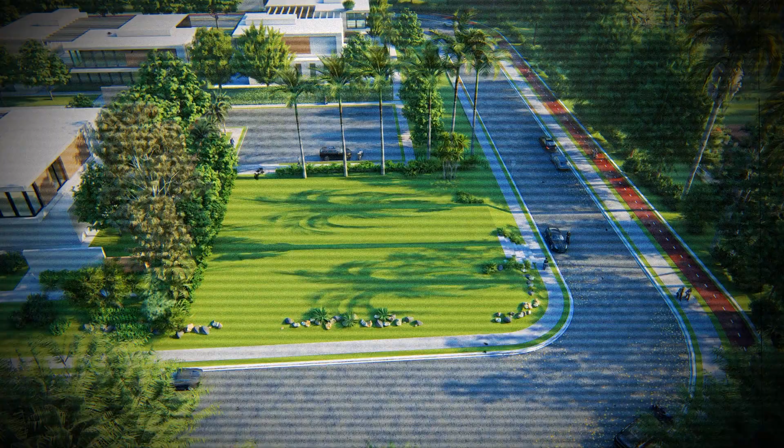With the aim of making the world cleaner, efforts to advance it are hydrogen-fueled cars and electric cars. Both cars produce zero harmful emissions on the road.

Unlike electric cars, which take a fair amount of time to recharge, hydrogen cars can be refilled about as quickly as a petrol or diesel car. But does this mean they're not polluting?

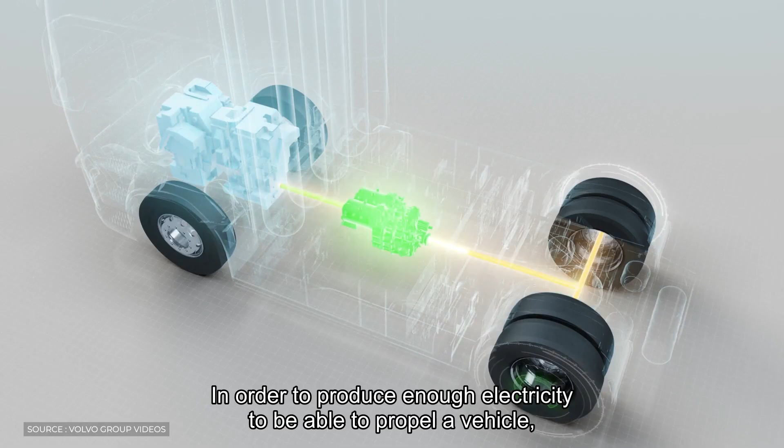First, it is important to understand how each technology operates in order to compare the two types of vehicles. The base of hydrogen-powered vehicles are fuel cells. Consider them the maestro of all the internal mechanisms that give the car its power to move.

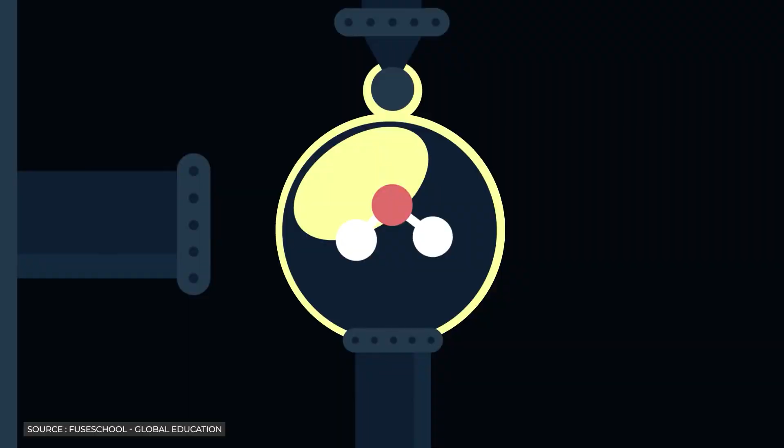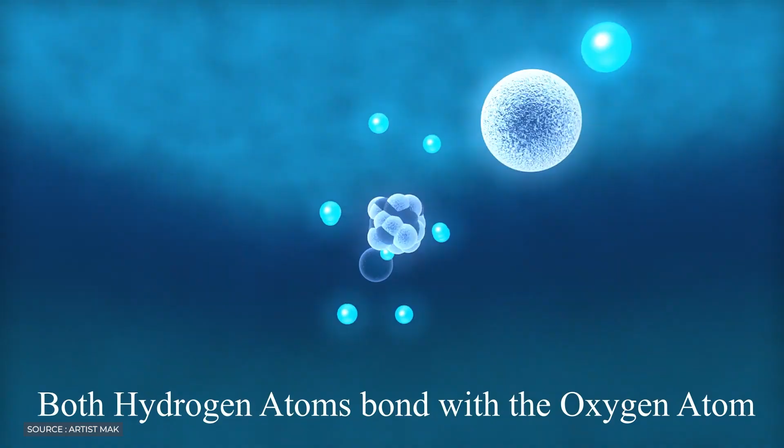A fuel cell in a hydrogen fuel cell vehicle is fed by a hydrogen tank with high-pressure hydrogen gas that will mix with oxygen. With no harmful exhaust emissions, the car is then propelled by an electric motor that is powered by this electricity. The only byproduct of the entire process is heat and water, produced when hydrogen and oxygen atoms come together to create water molecules.

Electric cars, on the other hand, are propelled by motors that draw power from rechargeable batteries or other portable electricity sources. No chemical reaction occurs once they are moving. Instead, the power the batteries receive during charging causes an electric reaction.

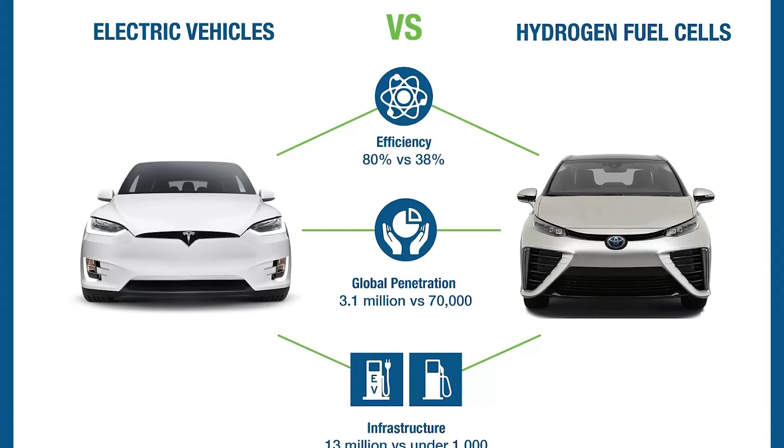But which is more reliable and friendly to the environment? Vehicles powered by hydrogen or electricity. Before making any judgments, let's take a look at the most important characteristics of each type of car.

Hyundai Nexo, a hydrogen-powered vehicle, has a range of about 330 miles or 550 kilometers, which is comparable to the best electric Tesla Model S.

However, it's challenging to estimate these cars' driving ranges precisely. It depends on a variety of factors, including the type of vehicle being driven, how many people are in the car, whether the air conditioning is on or off, whether the automobile is on a highway or snarled in traffic in the city center, and more. Because each person's unique combination of all these elements is distinct, various people have been reporting varied experiences.

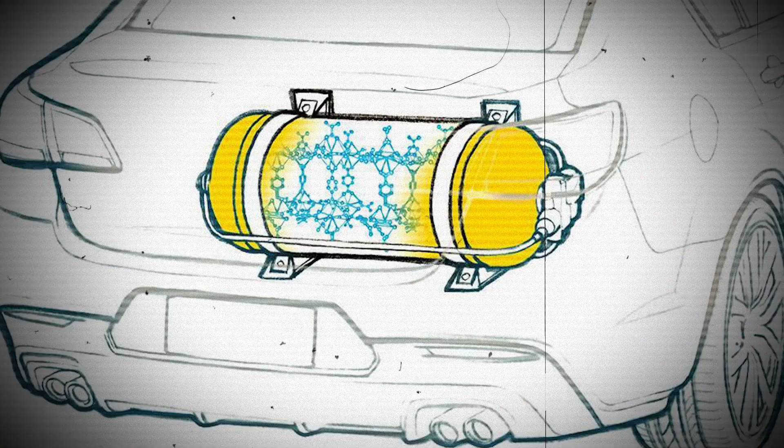However, because hydrogen vehicles pack their energy storage tightly, they can typically travel farther. According to Automotive Technologies, hydrogen-powered vehicles may travel up to 300 miles on a single charge, compared to the typical 100 to 200 miles for fully electric vehicles.

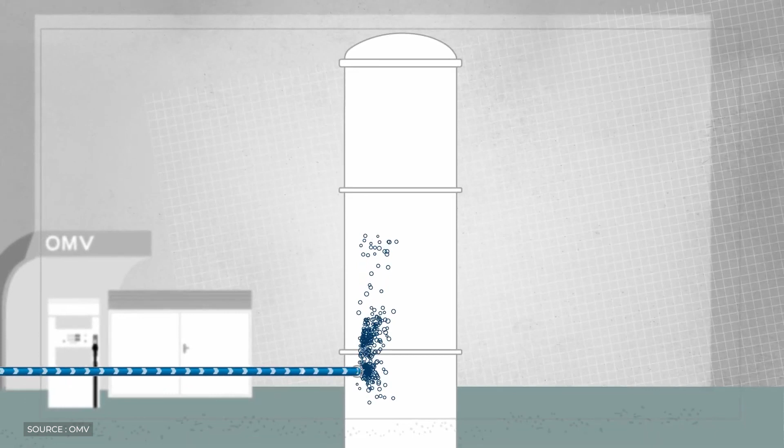Much more fascinating is how long it takes to pump hydrogen into the tank. Similar to any gasoline-powered car, it takes 5 to 10 minutes. While Tesla's 120 kilowatt fast chargers can charge batteries to 80% capacity in 30 minutes, the BMW i3 or Nissan Leaf may require 4 to 8 hours to reach full capacity.

In the end, the charging station and the type of charging connector clearly affect how long it takes an electric automobile to charge. Whatever the combination though, and even with Tesla's newest V3 supercharger, this is unquestionably a victory for the hydrogen vehicle. While the use of fuel directly in the car does not emit carbon dioxide, the manufacturing of

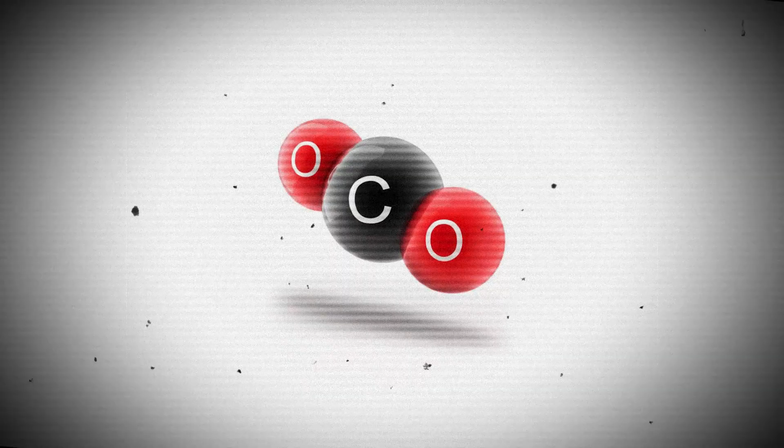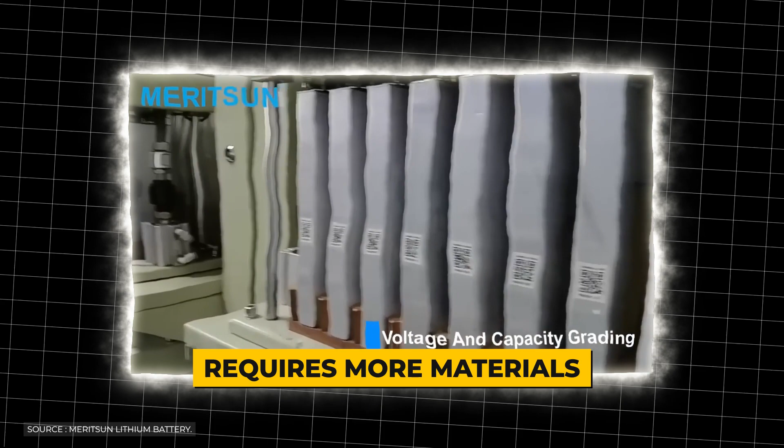batteries and the production of electricity both contribute to greenhouse gas emissions. According to Yang Shao-Horn, professor at MIT departments, producing lithium-ion batteries for electric vehicles requires more materials than producing conventional combustion engines, and the need for battery materials is growing.

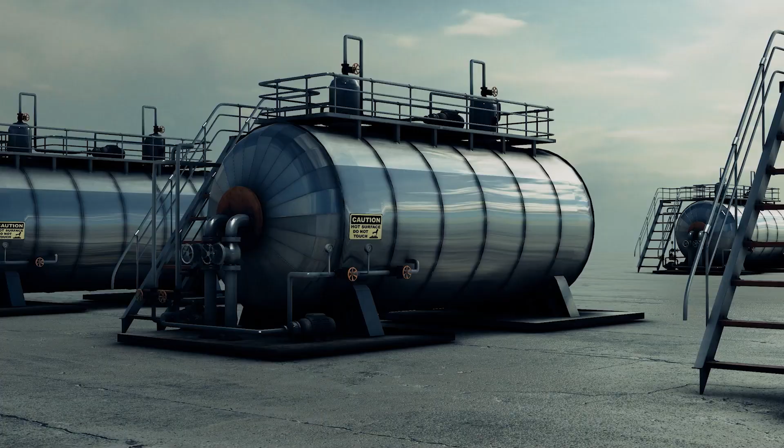The majority of lithium is now produced from hard rock mines or underground brine reservoirs, and a large portion of the energy required for its extraction and processing originates from CO2-emitting fossil fuels. Particularly in hard rock mining, 15 tons of CO2 are released into the atmosphere for every ton of lithium produced.

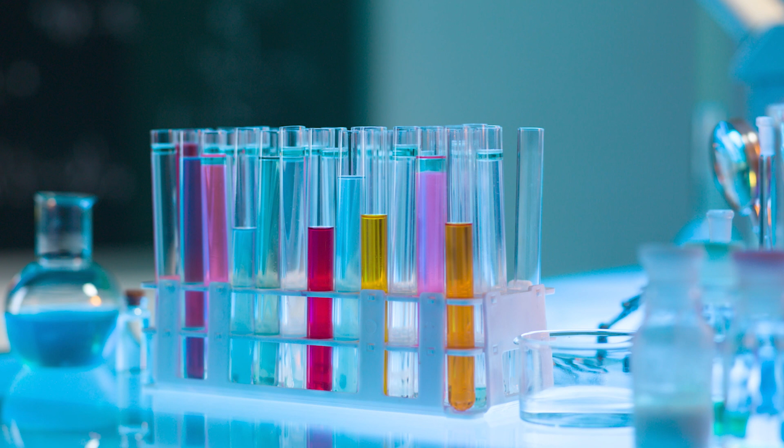Other costs are associated with battery materials. Lithium, cobalt, and nickel are examples of raw materials that need labor-intensive mining processes, large amounts of chemicals and water, and have the potential for contamination and toxic waste. 60% of the world's cobalt is produced in the Democratic Republic of the Congo, where concerns about issues like child labor persist. According to Shao-Horn, the environmental impact of manufacturing these batteries also increases.

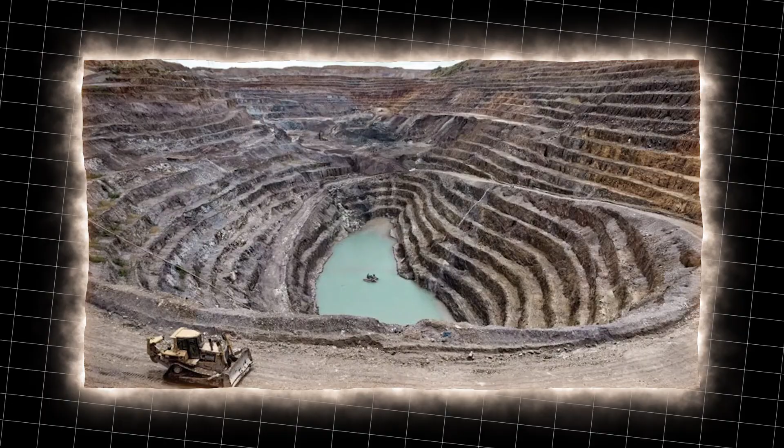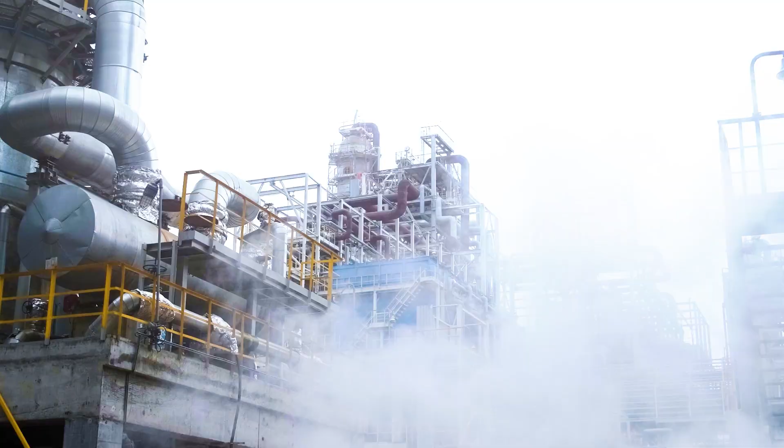It takes heat between 800 and 1000 degrees Celsius to synthesize the materials required for production. This temperature can only be attained economically by burning fossil fuels, which again increases CO2 emissions. Exactly how much CO2 is emitted in the long process of making a battery can vary a lot depending on which materials are used, how they're sourced, and what energy sources are used in manufacturing.

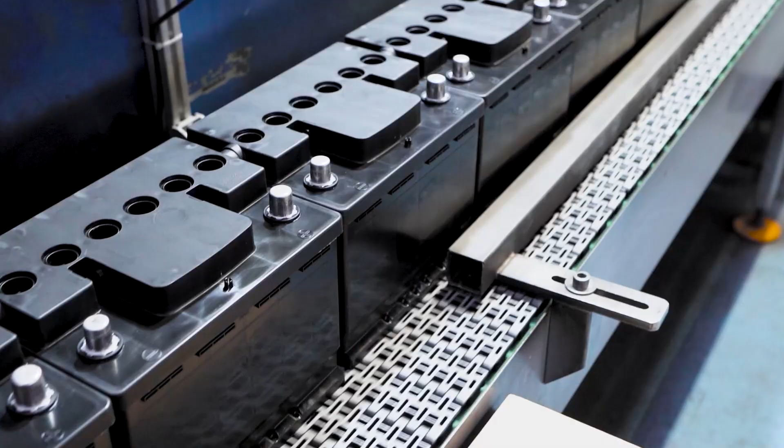The vast majority of lithium-ion batteries, which account for about 77% of the world's supply, are manufactured in China, where coal is the primary energy source. And coal emits roughly twice the amount of greenhouse gases as natural gas.

For illustration, the Tesla Model 3 holds an 80 kilowatt-hour lithium-ion battery. CO2 emissions for manufacturing that battery would range between 2,400 kilograms and 16,000 kilograms.

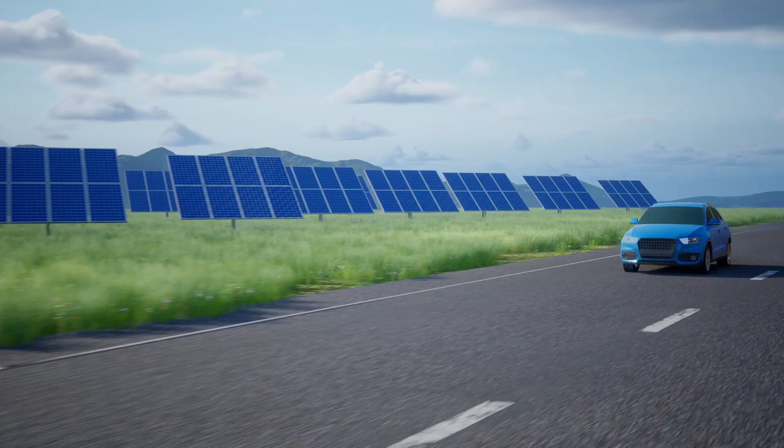Just how much is 1 ton of CO2? As much as a typical gas-powered car emits in about 2,500 miles of driving, just about the same weight as a great white shark. Electric cars generate approximately 17 kilograms of carbon dioxide per 100 miles traveled.

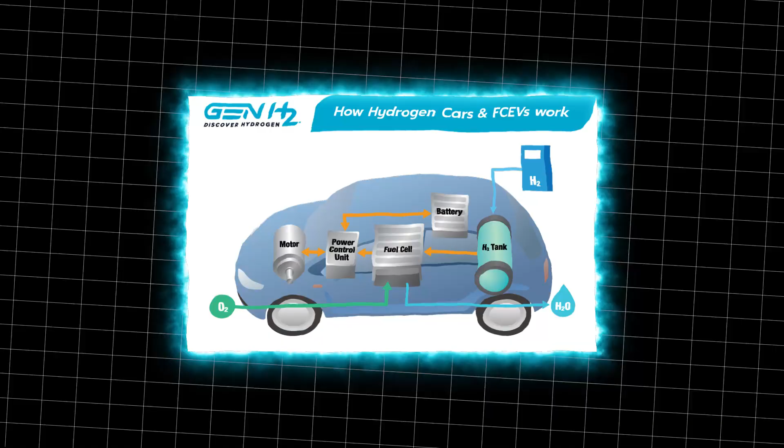Now let's talk about hydrogen cars. Although hydrogen is the most common element in the universe, it doesn't exist in its pure form on the blue planet. This means that if we wish to use it as fuel for our cars, we need to produce it out of other compounds like water, natural gas, or other fossil fuels or biomass.

And for this, energy needs to be used. Environmental and economic costs enter the equation. On one hand, to get hydrogen in a clean way is by reversing the electrolysis process of water. The problem is that this process of separating water molecules to get the hydrogen spends a high amount of energy, making it a very expensive process.

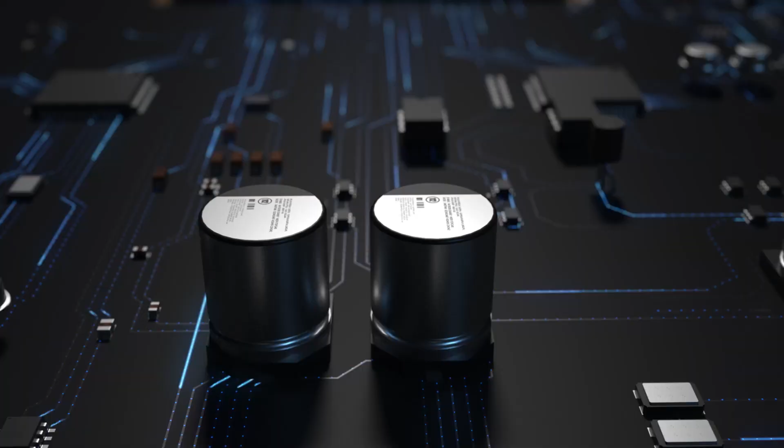However, if this energy is able to come from renewable energy sources like the sun or the wind, the net energy cycle can get very carbon low and the process turns more environmentally friendly. Yet, another situation is the efficiency of the process, that's only 75% efficient and allows for 25% of electricity losses.

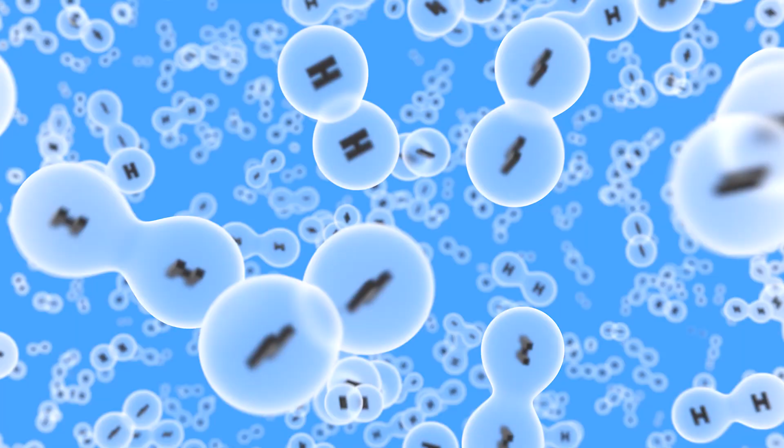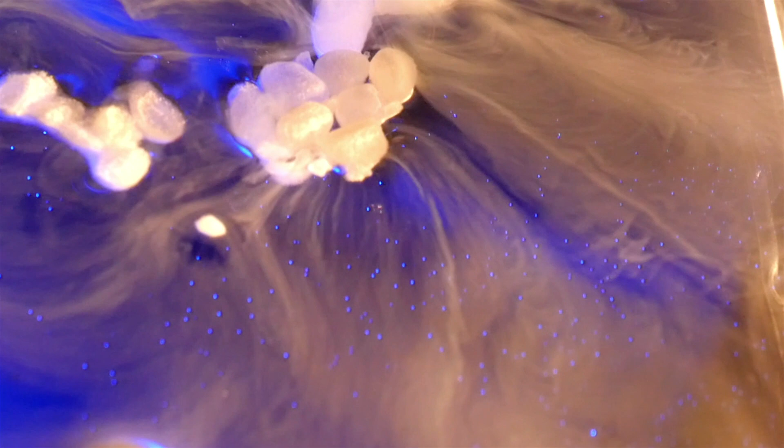This is why most hydrogen fuel is obtained by the process of methane reforming, which is less expensive than electrolysis. It is around 75% efficient, but produces 9 to 12 kilograms of carbon dioxide for every 1 kilogram of hydrogen. The downside is that harmful byproducts such as carbon dioxide and carbon monoxide are produced in the process.

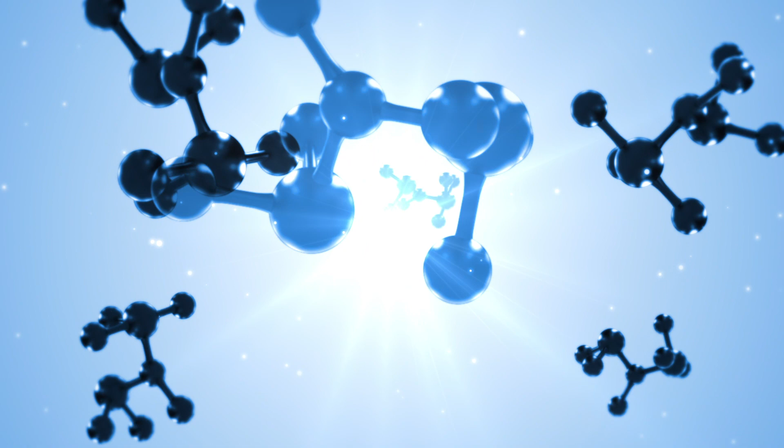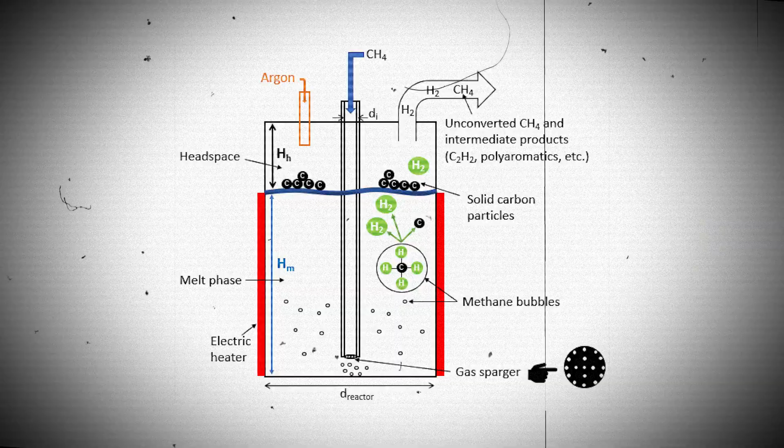Furthermore, and although they're becoming less frequent, methane leaks through pipelines while extracting natural gas are not convincing. These molecules are 86 times worse than CO2 released into the atmosphere. Even if the methane cracking process is improved, it isn't likely to be a long-term solution.

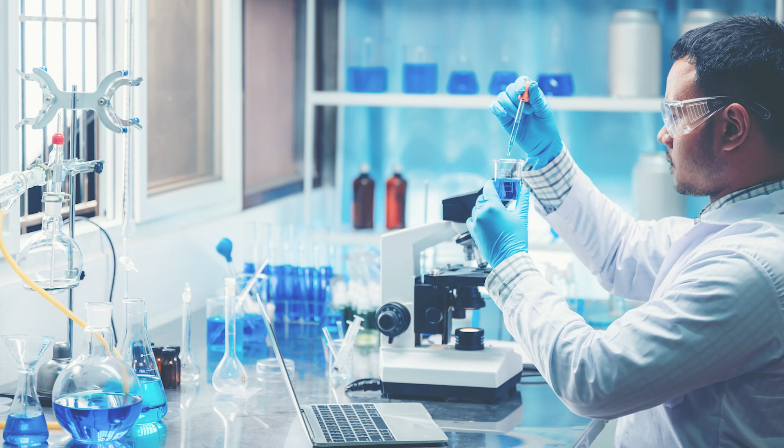Researchers across the globe are trying to design new manufacturing processes or new battery chemistries that can work with more readily available, environmentally friendly materials, but these technologies aren't yet available on a wide scale. If we don't change how we make materials, how we make chemicals, how we manufacture, everything will essentially stay the same, Schauhorn says.

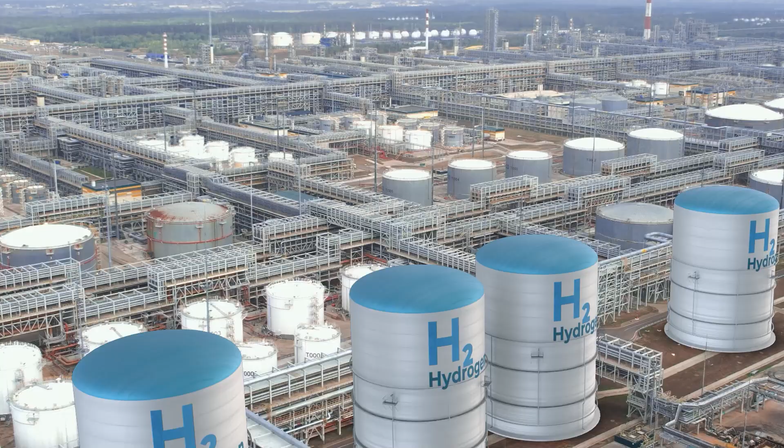On the other hand, new methods of producing hydrogen are being developed, such as the proton exchange membrane, which, according to scientists, might get to an 86% efficiency.

Until that happens, we need to wait and see, because the fact that hydrogen cars mean using energy twice, to make hydrogen and then using it to power vehicles, while electric cars can use the energy from the grid straight away, is a strong argument in favor of electric cars.

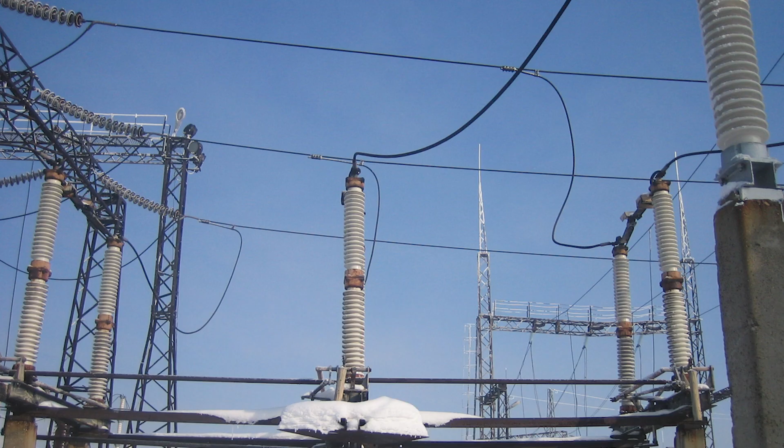All because after converting electricity into hydrogen and back to electricity might involve energy losses up to 45%, making it a not very efficient process.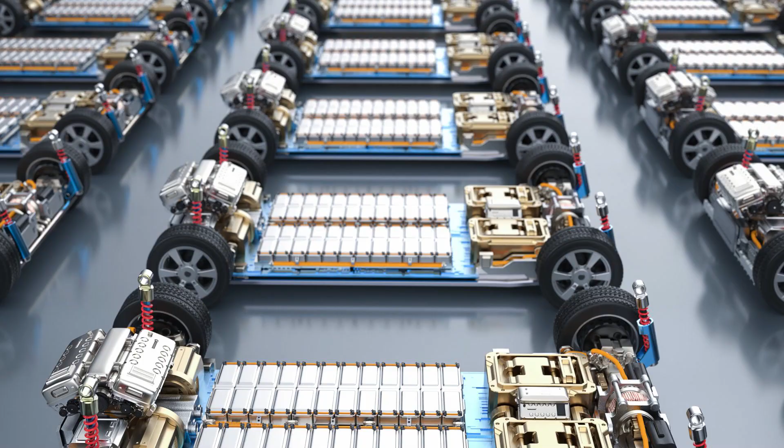Using the extra energy supply for hydrogen production and creating some hybrid version of hydrogen lithium-ion cars can also be something, once more studies come out clarifying whether this surplus energy is more efficient to use in dams or producing hydrogen. As for today, electric cars are a more accessible vehicle.

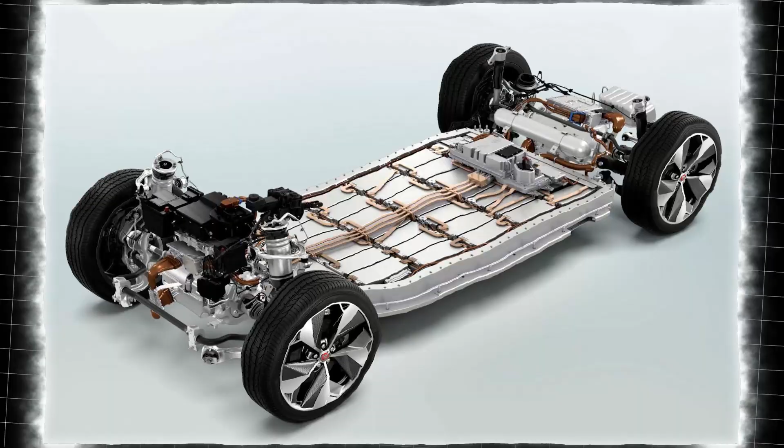They include more efficient processes compared to hydrogen-powered cars, and if their lithium batteries are reused to meet different ends, they're likely to stay a more sustainable solution, at least over the next few years.

All being said, hydrogen cars and electric cars both offer viable alternatives to traditional gasoline-powered vehicles in the pursuit of more sustainable transportation. While electric cars currently enjoy greater availability, lower costs, and more established charging infrastructure, hydrogen cars have the advantage of longer driving ranges and faster refueling times.

As technology progresses and infrastructure develops, the competition between hydrogen and electric cars will continue to evolve, ultimately benefiting consumers and the environment alike. Which one do you think is better?